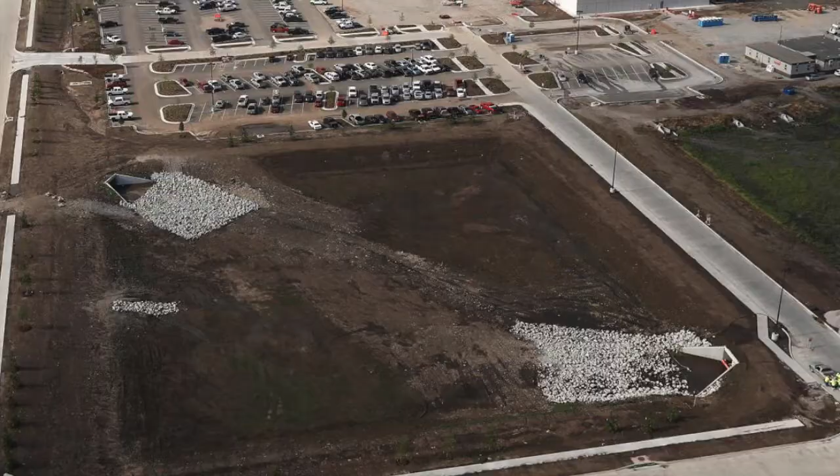The site of the Amazon warehouses at Matrix Global Logistics is a deeply fractured landscape. Watercourses have been disconnected by berms, roads, and commercial business. What is worse is that so much of this impact is unseen and misunderstood. Tidal wetlands remain, but in a dilapidated state. Plants still grow, but separated from their natural corridors, and waterways still flow, but far from their potential.

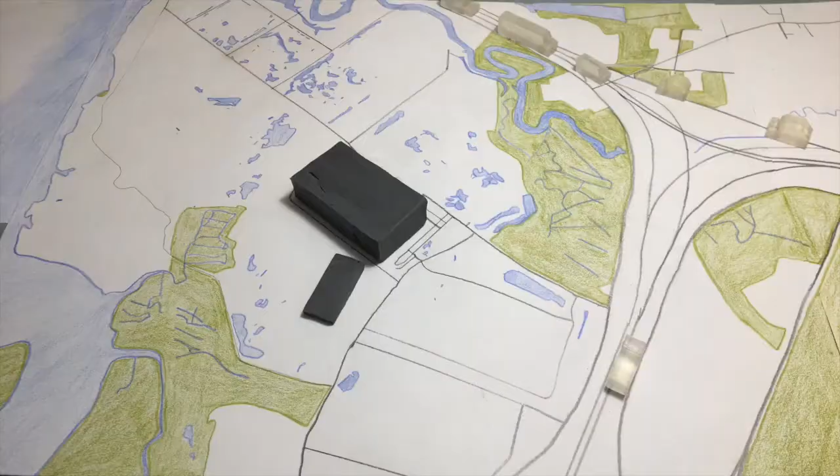The intensity of transportation in and around the site as a result of Amazon's residency can certainly be declared a form of slow violence. In this project, I hope to make visible the fractured landscape, disconnected hydrology, and the impact of the relentless movement of delivery trucks.

Through on-site water collection and reuse at a truck washing facility, sediment and seed can be captured from the delivery trucks and replanted. The integration of these migrated seeds in vegetative swales will serve as a performative landscape, showing the distance, frequency, and pervasiveness of delivery trucks.

I'd like to highlight these words as part of my central lexicon: toxicity, visibility, performance, movement, and fragmentation. Art has long been used in forms of activism, and the performative landscape takes inspiration from that.

This project was inspired by other precedents of performance in highly visible landscapes, including Agnes Denes's Wheatfield in Battery Park City in 1982, Mierle Laderman Ukeles's maintenance artwork with DSNY titled Touch Sanitation Performance, which includes The Social Mirror from 1983, and former First Lady Lady Bird Johnson's work to plant wildflowers in highway medians. With this project, I'm taking a twofold approach, first with on-site design interventions and off-site ecological restoration.

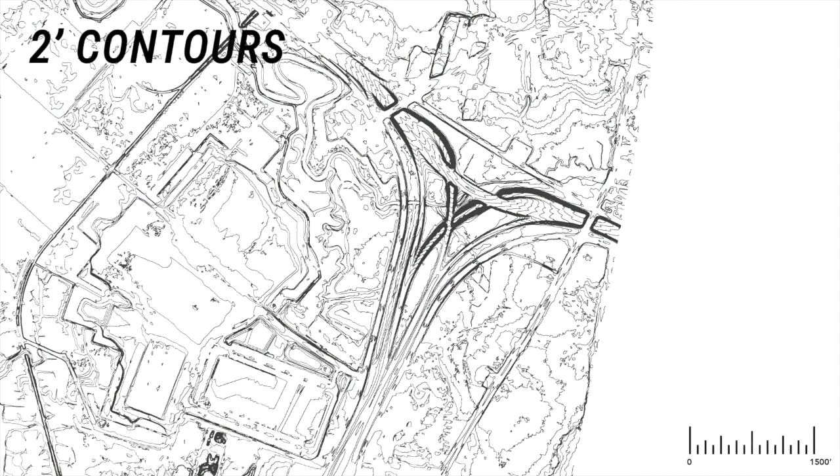By exploring the site through a series of map layers, I can highlight the existing conditions of focus and areas of design changes. Here, the waterways and wetlands have been fragmented by the roads, a crucial part of Amazon's network. Highways are one of the main causes of disconnected wetlands, also impacting the numerous surrounding wetland typologies.

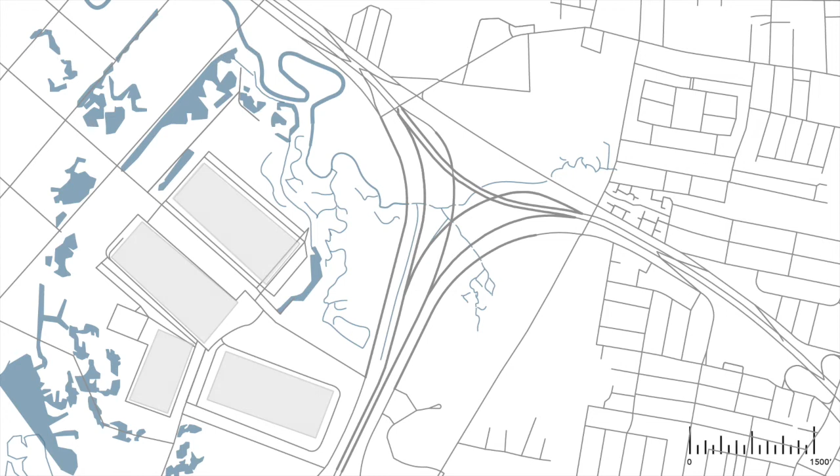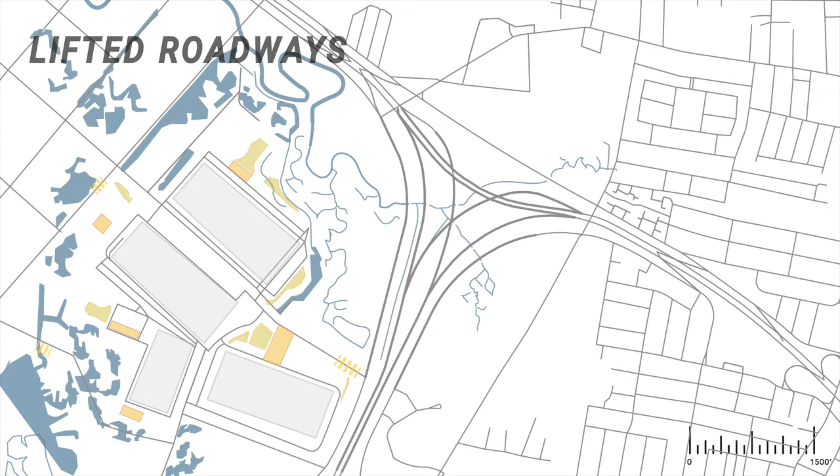The warehouses themselves are massive, with thousands of workers inside and even more packages. Detention basins flank the buildings as the current stormwater management strategy, but I am proposing a series of truck washing stations around the campus, as well as lifted roadways to establish wetland recharge and dedicate high visibility areas as sites of performative planting.

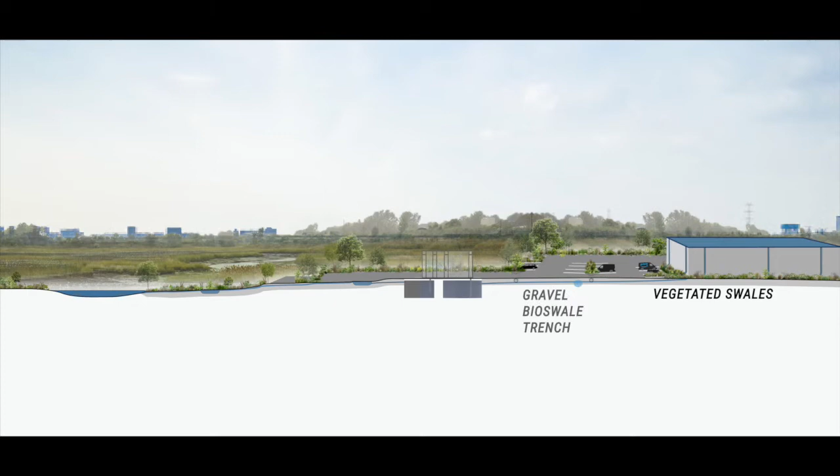The hydrology of the site will be integrated with the truck washing stations. Stormwater captured on the warehouse roofs will pass through green infrastructure plantings for filtration and gravel-lined bioswales as a way to make the movement of the water more visible as it moves to the truck washing station.

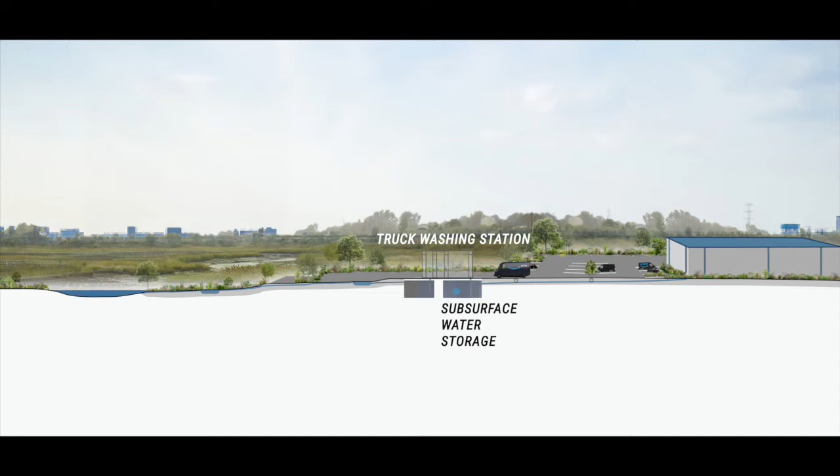By using water captured on site for this necessary form of truck maintenance, no additional resources will be needed to clean the trucks. The water and debris will be captured for filtration and directed back into the gravel bioswales, slowing at certain points to increase water quality before recharging the surrounding wetlands.

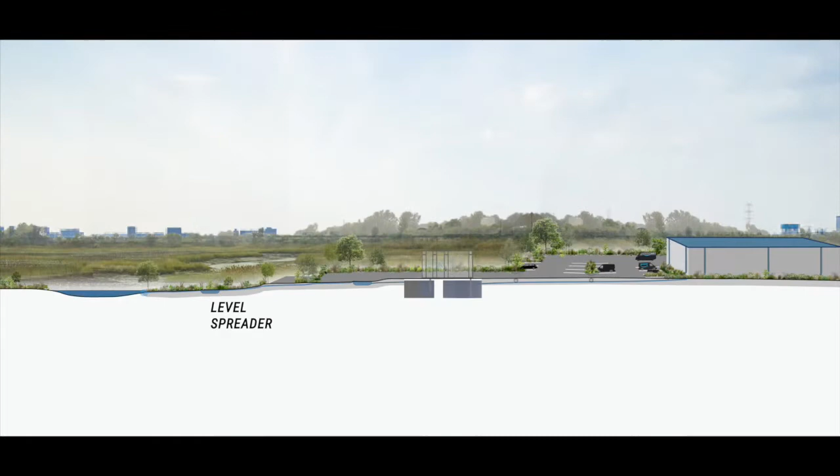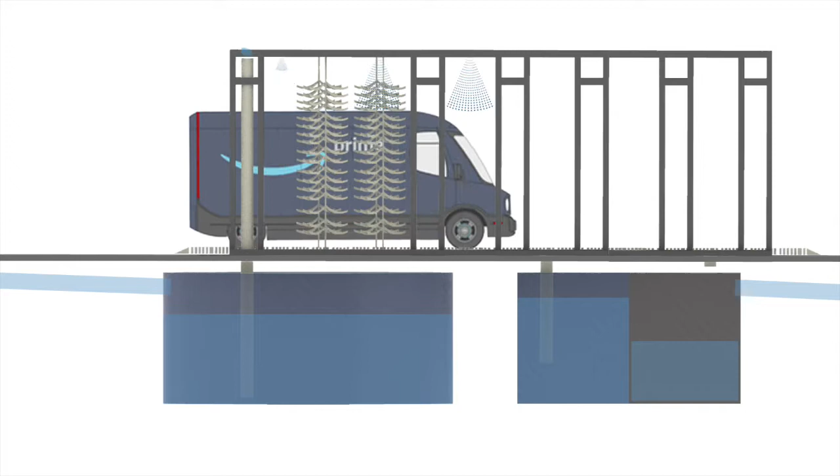Truck washing requires minimal infrastructure. With very modular systems available, they can be as mobile as the trucks themselves. The trucks are washed with the water collected from the site, and seeds, sediment, and debris are captured in a baffle system before the water returns to the bioswales.

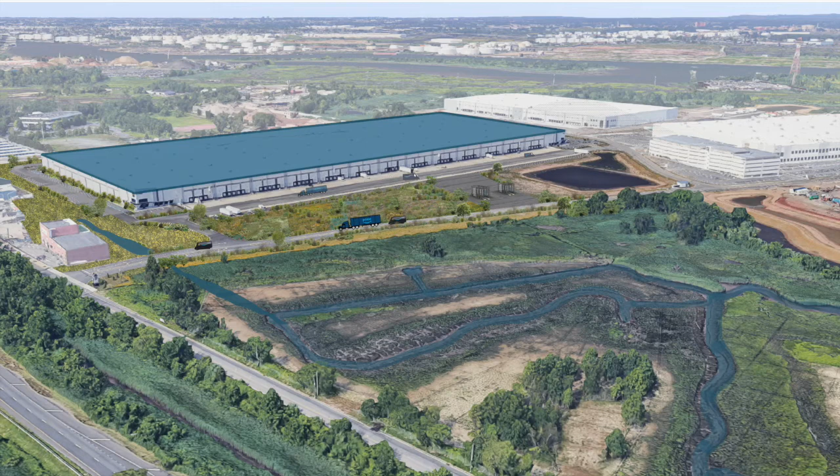Because of the square footage of the warehouse roofs, which is over 3 million square feet, the number of new truck wash stations, and the number of trucks, millions of gallons of water can be reused on site and filtered for wetland recharge.

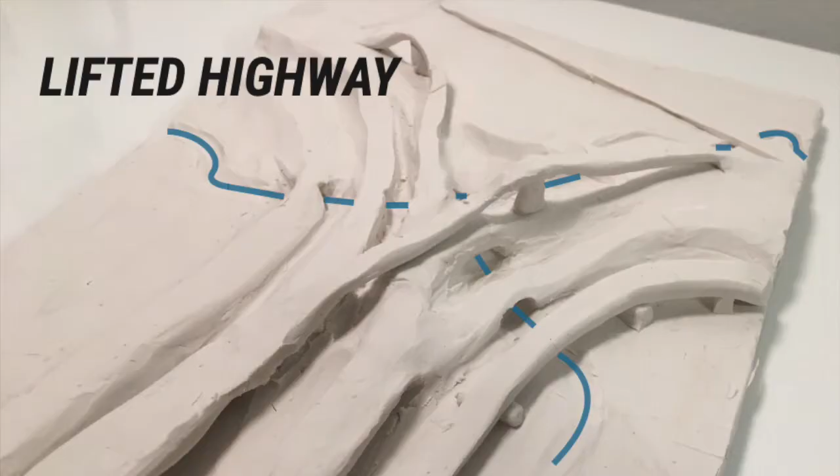One way to do this is by increasing the porousness and permeability of the site. Roadways in this area have been bermed up in their construction to avoid tidal wetland flooding, but the roads now act as barriers for the hydrology, as well as other plants and animals. By lifting the roadways or punching through the berms, water can move off-site to the surrounding fragmented wetland waterways.

The materiality of what comes off the trucks during washing is generally considered waste. But the seeds and sediment captured in this process can be recovered and replanted on site as a way to create visibility around the trucks' persistent movement. These seeds, combined with native seed mixes specifically tailored for this site, are added to high visibility areas as a form of landscape performance, intended to be both on-site gardens and signifiers of the slow violence of delivery trucks.

Pushing this idea further, I wanted to harness the primary movement of the Amazon trucks, which is to deliver packages, and co-opt that movement for a secondary purpose, that of reseeding the landscape. The truck washing station infrastructure provides the necessary means to add seeds to a truck with the intention of dispersal. Using hydroseeding as a precedent, a layer of custom seed mix can easily be added to the truck roofs right after they are washed.

As the trucks travel, seeds will blow off the roof. We know that most wild and spontaneous seeds don't become plants, but the small portion that do can create a highly visible reflection of that truck movement, forcing all of us to look at the performative planting and our own role in the slow violence of package movement.